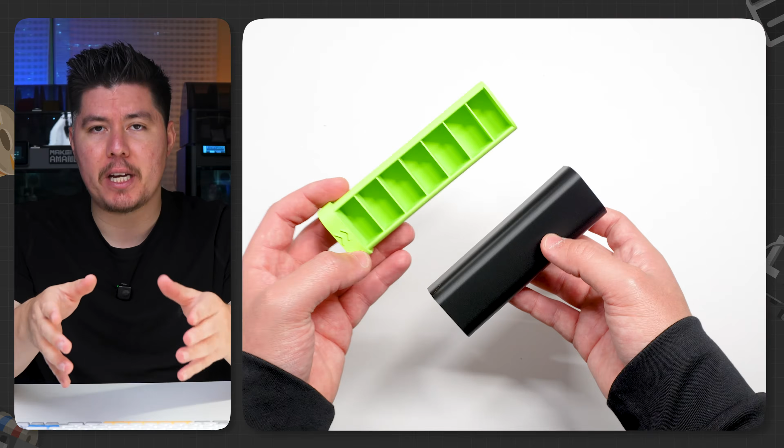Welcome to day 6 of learning how to design for 3D printing, and in today's video we're going to learn how to make this 3D printable pill organizer from start to finish. This design is going to be a little bit more complex than what we're used to, but I promise I'm going to walk you every step of the way, and by then I'll show you exactly how to 3D print a model and even more so how to 3D print a design when you're trying to use as little supports as possible to get the best outcomes for your 3D prints.

So with that said, let's go ahead and jump right into my computer and get started. Okay, so here we are within Fusion 360, and the first thing we need to do here is to create a new design. To start, let's hover over to the right hand side, click on New Design, and Fusion 360 is going to prompt us to select an option.

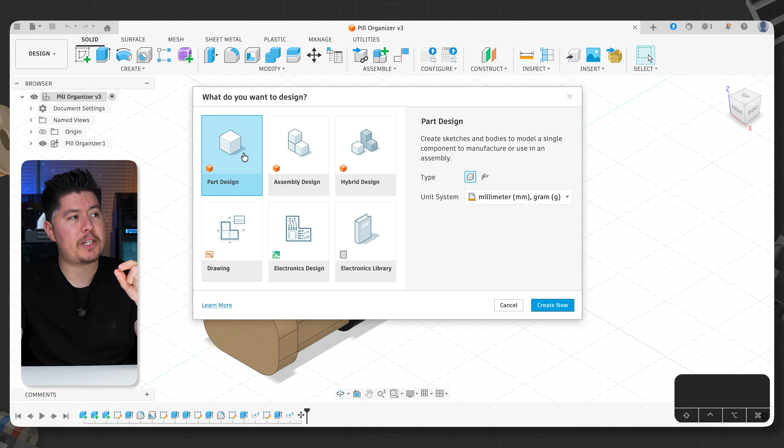Now, this video is going to be a little bit different since we're creating two parts and pieces which make up the entire product. Instead of selecting part design, which creates an individual part or piece, we're actually going to select hybrid design, which lets us create multiple parts and pieces that interact with each other within Fusion and that we can separate, giving them their own unique profile and identity within their timeline. With that said, let's go ahead and select hybrid design and click on Create New.

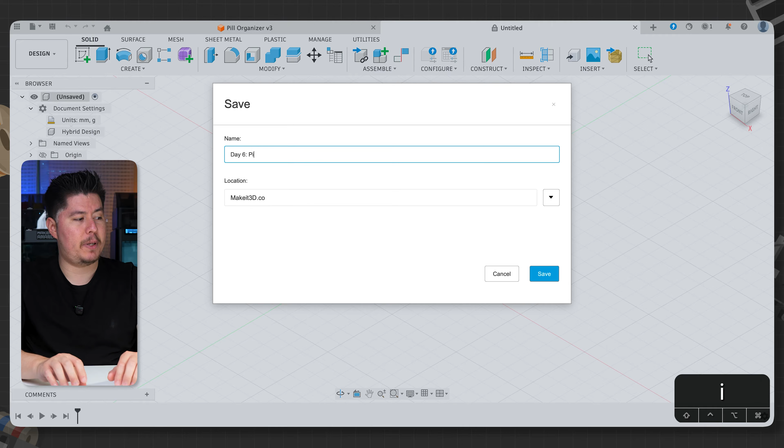Now, the first thing we want to do here is to save this. So I'm gonna press Command S, type in day 6 pill organizer, and press save. Now, with that completed, you can see here on the top left-hand side in our browser menu that this has been saved within our canvas here. The next thing I want to do here is to create a total of 2 new components, so that way we can actually separate the parts.

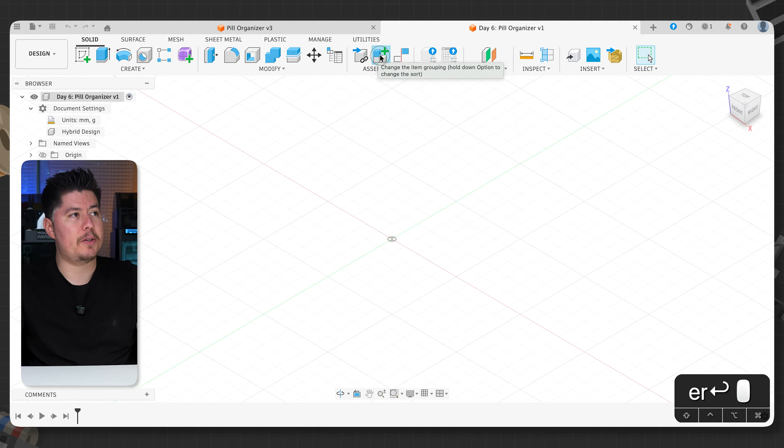So to start, what we want to do here is to select the new component icon here in the middle section of our screen. Select new components, and then this dialog box here is going to appear within our canvas. Now, don't worry about the extra options within our dialog box here. What we're going to do is just name this to slider, which is going to be our first component, and press OK. Now, as you can see, on the left-hand side, it has created a new component within Fusion 360.

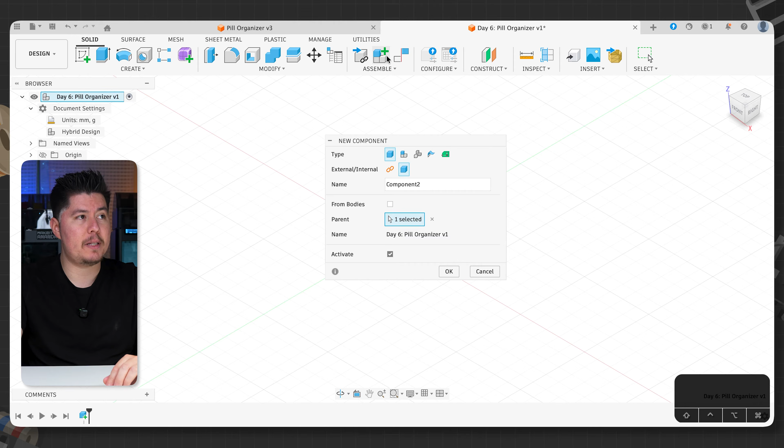Let's go ahead and toggle our top level component, which is going to host everything that we have beneath it. Then create another component, and let's go ahead and name this to container. And then press OK. Now, as you see within Fusion, we've created 2 new components. We have the slider, and then we have container.

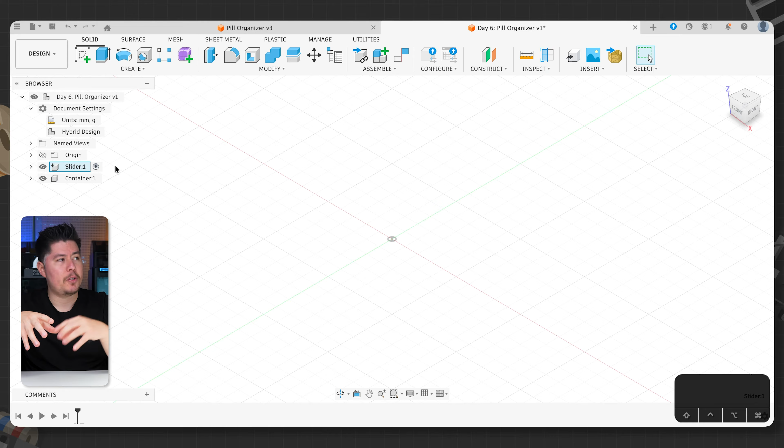Now, whenever we're working on a certain part or piece, we're gonna work on that piece individually within its proper component. And the reason why this is important is because, let's just say you want to create a design, but maybe you wanna test that design by changing the dimensions, the sizing, the features, or maybe something about that design. You can actually copy these pieces and paste it as an entirely new project without it affecting the original one, which I'll show you exactly how that looks later on in the video.

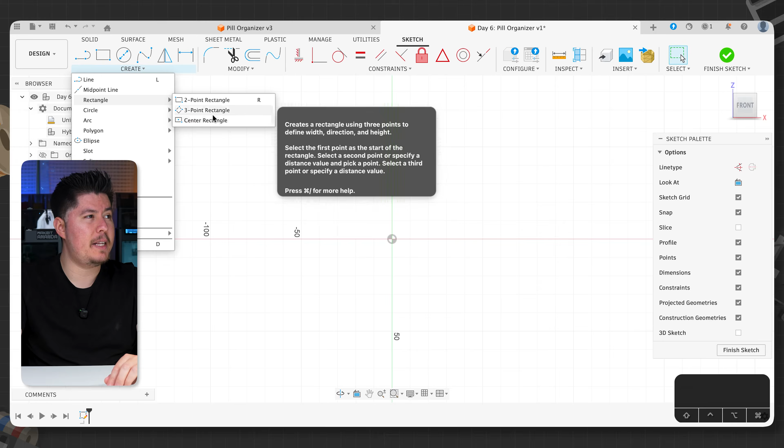So to start, let's go ahead and start off with our container, which is the easiest one. So go ahead and toggle the container component here and activate the component that allows us to start designing for that specific folder there. To start, let's go ahead and click on Create Sketch, then select the front plane here. Now what we want to do here is hover over to the top left-hand side, rectangle, then select center rectangle. From here, let's go ahead and draw out from the origin, and we're going to set the dimensions here to 30 by 40. Pressing enter on my keyboard, and now you should have something that looks like this.

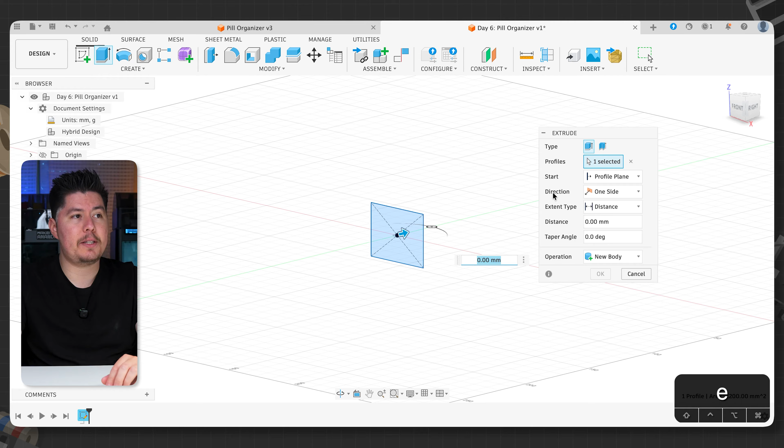Let's go ahead and press E on our keyboard, which is going to take us out of the sketch environment and allow us to extrude this profile. And what I want you to do is to set the direction from one side to symmetric. This means if I were to set the value to, let's just say 60 millimeters, by default, it's going to extrude one side of this profile 60 millimeters to the right, and then one side of this profile 60 millimeters to the left, which gives us a total length of around 120 millimeters.

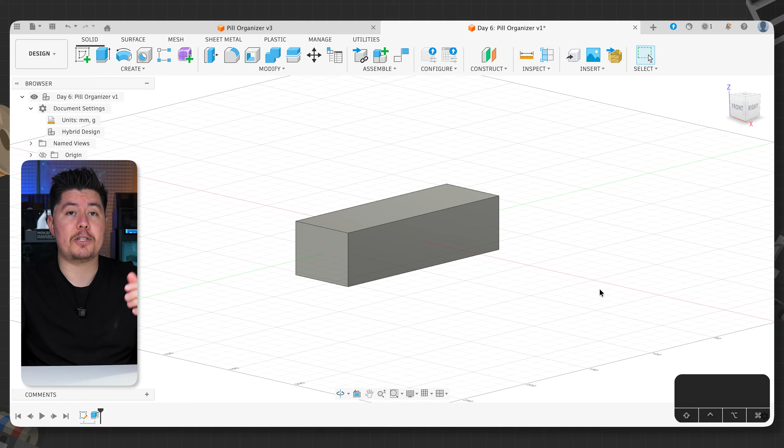So I'll go ahead and press OK. And just to confirm the length of this box here or this rectangle, you can use this inspect feature here called the measure icon. And you can measure one edge here of this box going all the way to the right. And as you can see, that is 120 millimeters, like as done with the extrude feature within Fusion. Let's go ahead and close this out, and let's start adding some features to this.

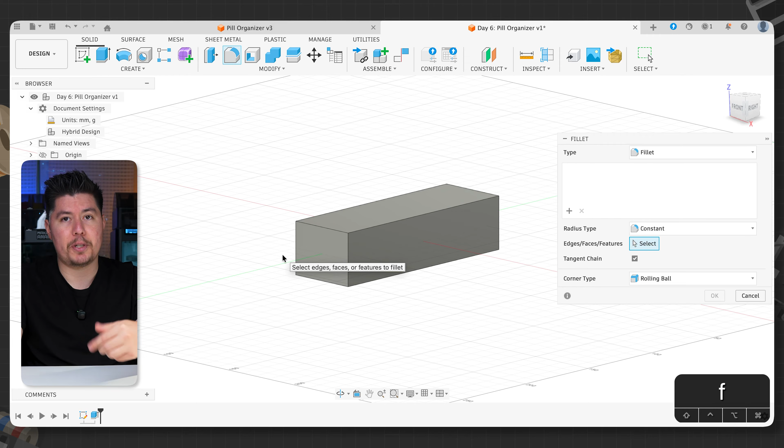So I'm gonna press F on my keyboard, which allows us to use the fillet option within Fusion, selecting all 4 edges around this rectangle. Now that we have all 4 edges selected, let's go ahead and fillet this in to around 10 millimeters, and then press OK.

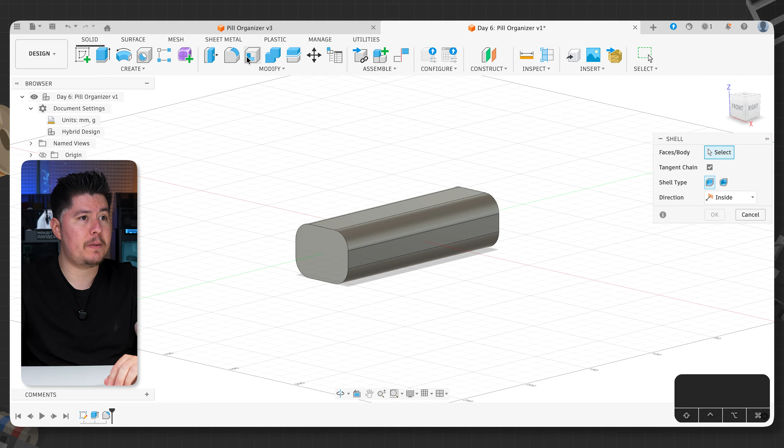Now, the next thing we need to do here is to create the opening or the insert for our pill organizer. To do that, we're going to use the shell feature within Fusion, then select this face here, and we're going to set the value to 2 millimeters. Once done, we'll press OK. And now you have the overall shape and features for our container. Now, with that done, go ahead and press Command S, make sure to save it within Fusion, press OK. And now let's move on to the next piece.

Now, to do that, we can hover over to the slider icon here within the components menu, and let's go ahead and activate this. Now, as you notice within Fusion, once you activate the new component, the previous one is going to turn into this opaque, transparent look. But what you'll also notice here is that our timeline is now completely blank. And if I were to toggle in between the two, our timeline has all the features we added, while if we were to toggle on the previous one, all of them are gone.

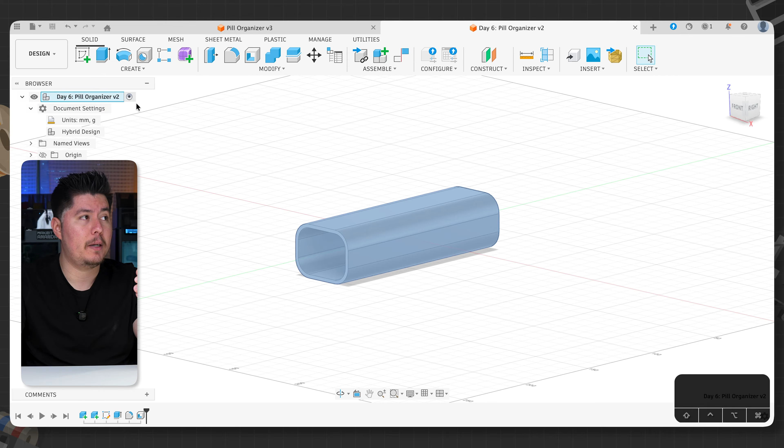Now, if you want to see the timeline for every single thing that you've created, you can toggle the top level component here, which is going to show everything you've done from the very start, which is why it's critical to organize these parts and pieces, because you can actually see everything you've done from the very top level to its own unique level where you created its component. So let's go ahead and activate the slider component here within Fusion, and let's start with our sketch.

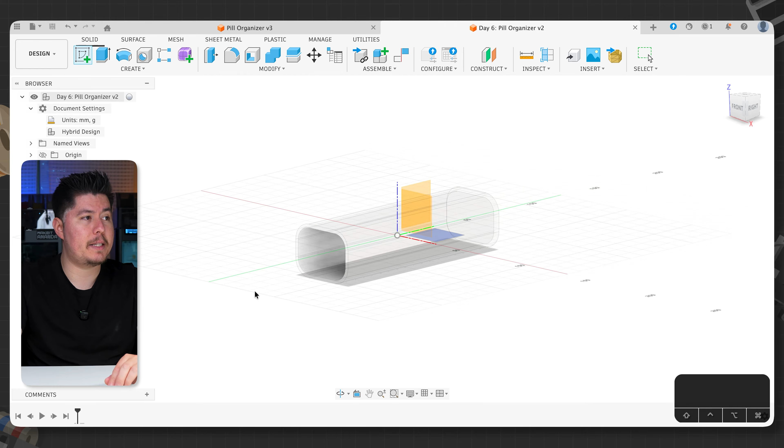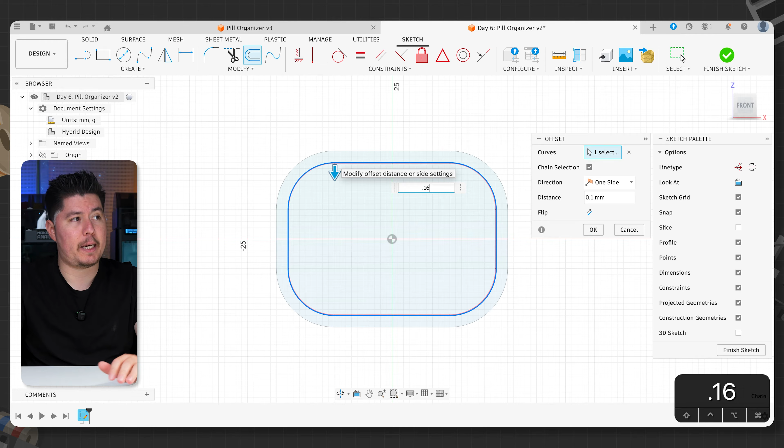So to start, we're going to click on Create Sketch, and then select the front face on our product here. Now, with that done, we need to create an offset. And this offset is going to create a gap for us to put in the pill organizer inside the container. So I'll press O on my keyboard, then select this edge or this sketch piece here, and drag this in to 0.16, making sure that the offset that you create actually goes inward instead of outwards. So 0.16, and then press OK.

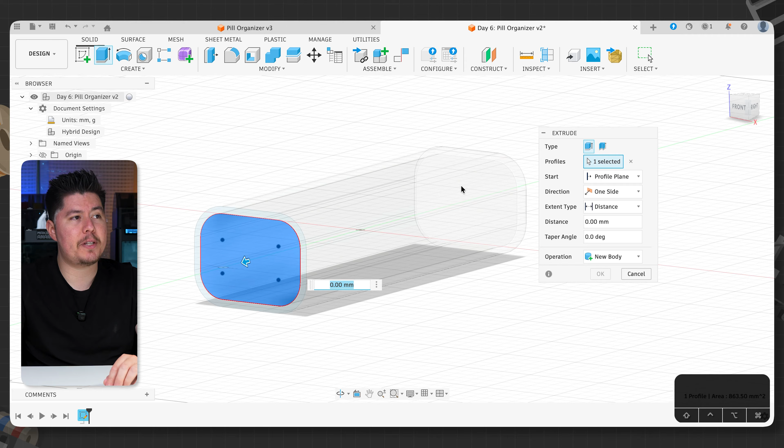Now, with that done, let's go ahead and press E on our keyboard, selecting the profile we just made. And now what we want to do here is to set this profile extending all the way to the very back of this face here. Now, you kind of can't see it. It's a little bit difficult to see, but as you notice here, as I hover over it, it highlights as my cursor goes over the product.

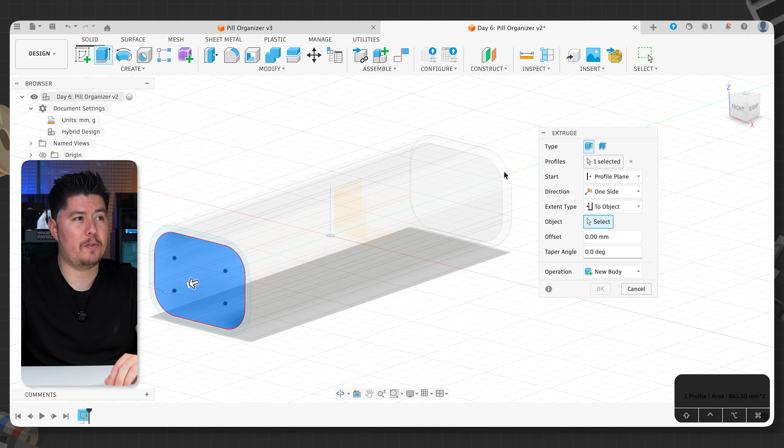So to do this, what I want you to do is to change the extent type from distance to to object. And then I can actually hover over my product here. And as I hover over it, it's kind of hard to tell. So what I'm gonna do here is rotate this around. I'm gonna select this face and hold down my cursor. And by holding down my cursor, this actually allows me to select the inside piece of my model here.

You can see here, it's actually separated into 4 different faces. What I wanna do is to select the face that actually represents the piece on the inside. And as you hover over it, it's gonna highlight it. You can see that this face is on the inside, this face is on the front, this face is on the inside, and this face is the curved edges that we created with that fillet.

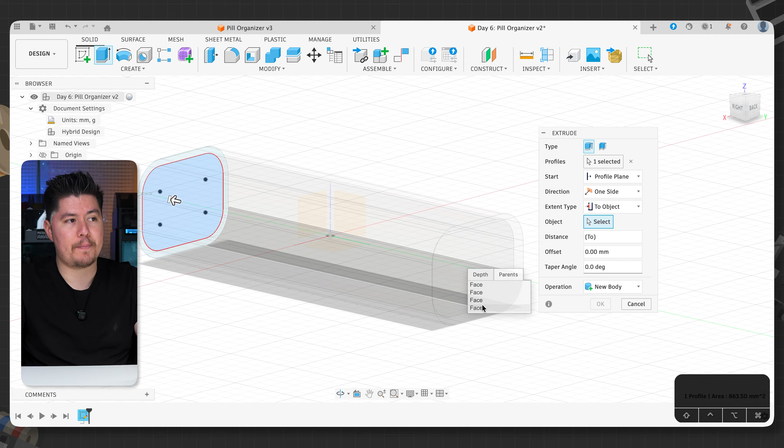What I want to do is to select this inside face. Now, you can't really tell that well unless you actually zoom in, so I would suggest you zoom in, hold your cursor, then go ahead and select the second face here.

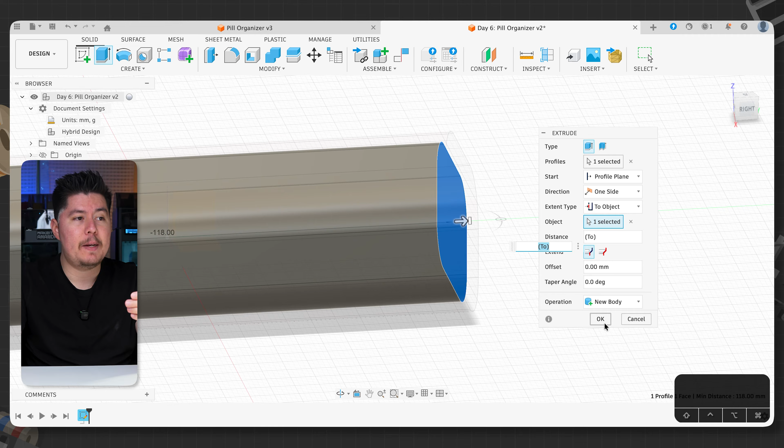Once done, that's going to extrude your profile going all the way to the inside of your container. Now, the unique thing about this feature is that this is going to extrude it all the way to the very end, which means that since this is extruded all the way to the very end and the distance is set to To, let's just say if I wanted to make my pill organizer longer, and just to quickly show you,

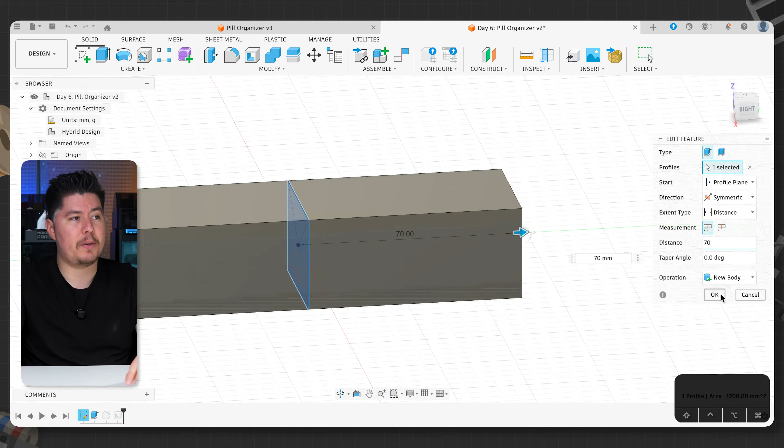what I'm going to do is I'm going to hover over to my container. So don't follow along, I'm just quickly showing you. Going to container, and let's just say I wanted this to be longer for whatever reason. So maybe instead of 60, I set this to 70. And I press OK. You can see now the slider that we created is going to extend all the way, factoring in that 70 that I preset there.

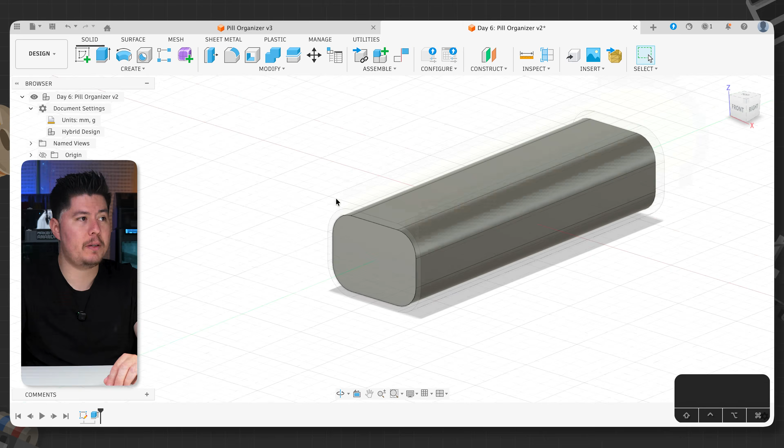So of course, I'm going to undo this since this doesn't follow along the original part of the tutorial. So like I mentioned, don't follow along. I'm just quickly showing you what that looks like. So going back to my slider here, now that I have my product fully modeled within Fusion, the next thing we need to do here is to create the handle for our container. More specifically, a part or piece that we can actually get our hands on in order to pull this out.

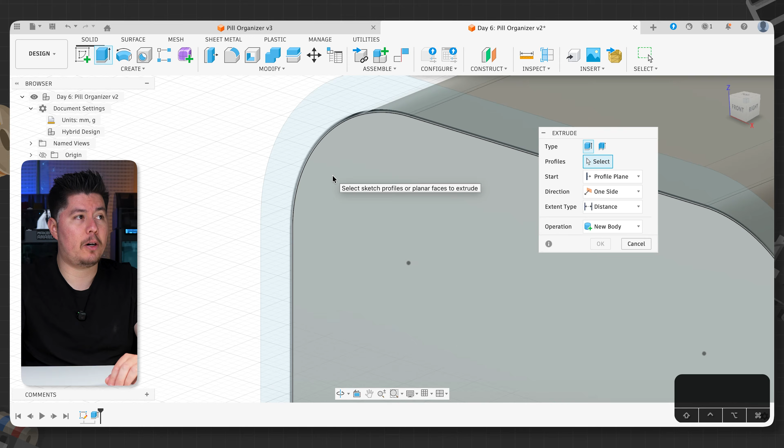So if I were to press E on my keyboard, what I'm gonna do here is toggle on my slider and make sure to turn on Sketch 1. Then from here, zooming in, we're gonna select all the profiles that we just created here, making sure that you select the one that we just created in the center, which is the offset one. Then pressing E on our keyboard, setting the distance to 10 millimeters, and make sure the operation is set to join and press OK.

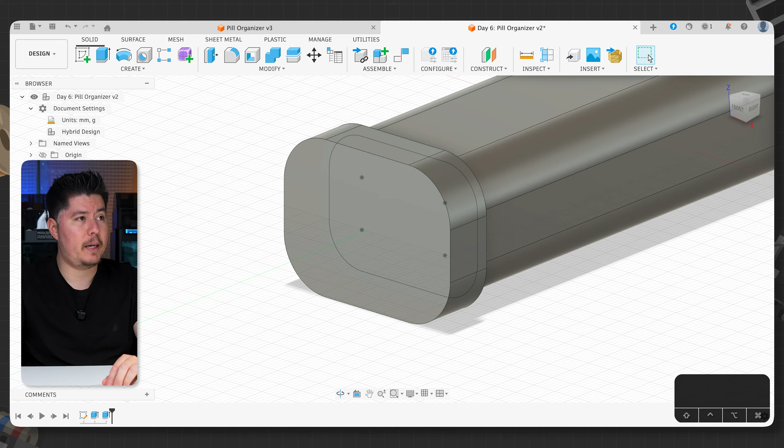Now let's go ahead and turn off our container since we won't need that for now. So I can toggle off the eye icon here on the top left-hand side, and now we've turned off our container. Okay, so now that we've created our container, the next thing we need to do here is to create an opening for it, as well as some cutouts and subsections to put in our pills.

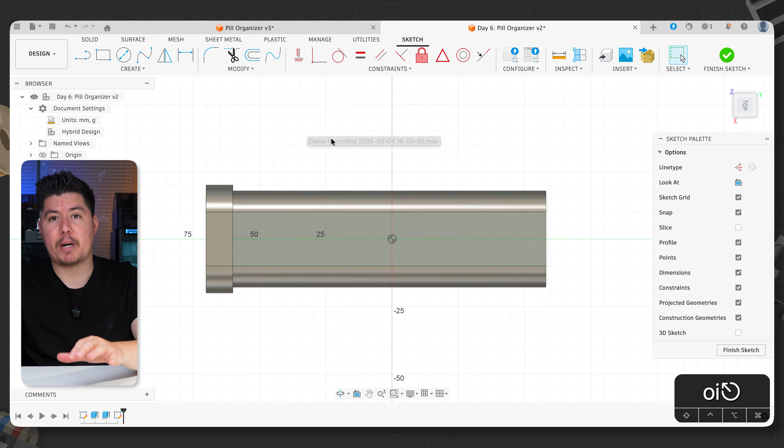So to start, we're gonna click on Create Sketch, then select the top face here. And what I wanna do here is reorient this to get a better look, and I'm gonna press O on my keyboard. This is gonna allow us to create an offset. So I'll select this top face here, which is this line here, and I'll offset this by 4 millimeters. I'll press enter, and as you can see, this created a rectangle going all around our product. Now, don't worry if it extends over our design.

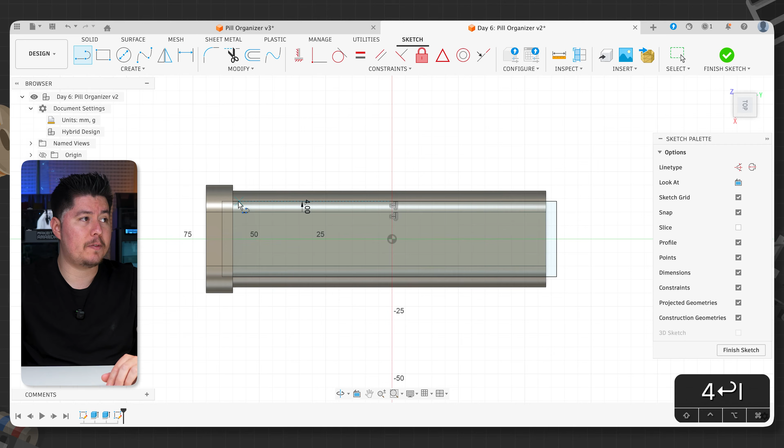What we're gonna do is press L on our keyboard and then create a total of 2 lines. One here at the left, making sure that there's some spacing between this line here and this line here, and one here on the right. Don't worry if it's not perfect. We'll dimension this out by pressing D on our keyboard, selecting the edge of the body, then our sketch, setting the value to 2 millimeters. Same thing for the left-hand side, setting this to 2 millimeters. And now we have our profile.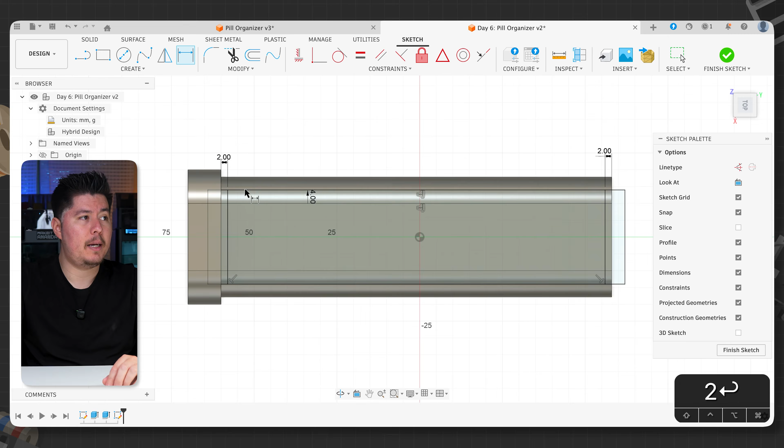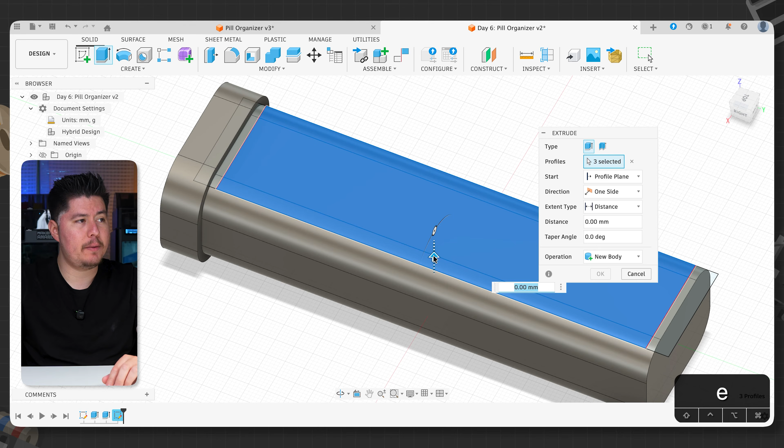Then we're gonna press E on our keyboard and select the profiles that we just created, which is a total of 3 different profiles. And as you can see, since we created an offset that sketched out the entire piece here, we can just use the ones we created on the inside rather than using the whole sketch. So let's drag this down to somewhere around -22 and press OK. Make sure the operation is set to cut so that way you actually cut into your product.

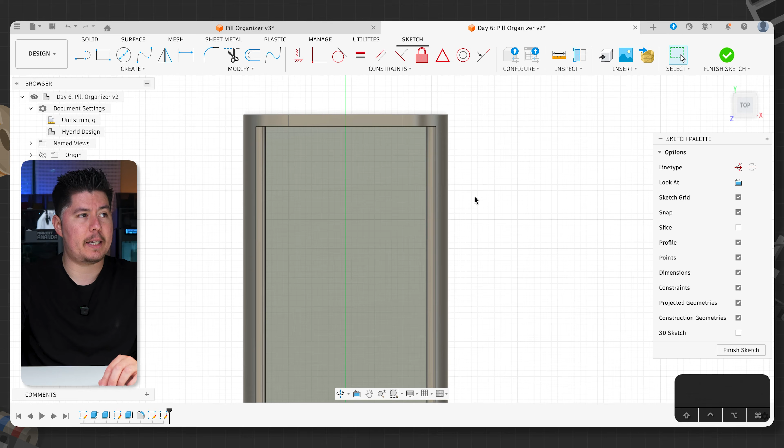Okay, so the next thing we need to do here is to create several different sections. To start, we'll click on Create Sketch, then we'll select the bottom plane here. And what we want to do here is to press L on our keyboard and create a total of 2 lines from the left-hand side going all the way to the right, making sure it's completely straight.

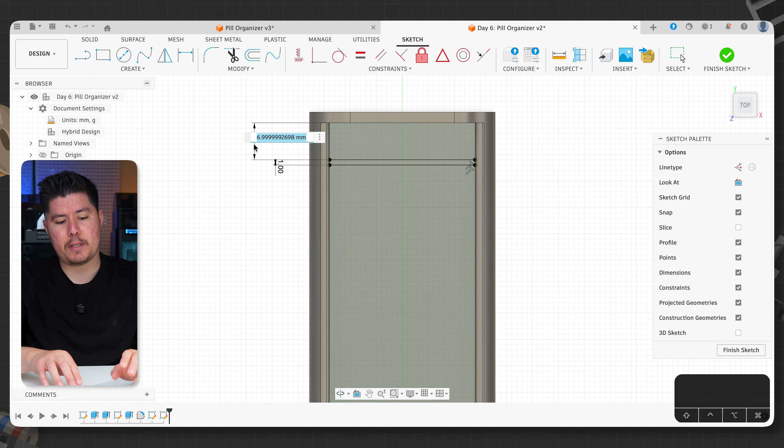Then from the left all the way to the right once again, then pressing D on our keyboard, we'll go ahead and dimension this out. And I'll leave this to around, let's just say 1 millimeter. Next, I'll also dimension the side here. And I would say somewhere around 25, which is a little under 1 inch, but pretty close to 1 inch. So I'm good with that.

Once done, let's go ahead and finish sketch. Press E on our keyboard, and let's go ahead and drag this out. And we'll drag this out all the way to the very top, right as it meets our fillet. I'm gonna make sure to set the operation to join and press OK.

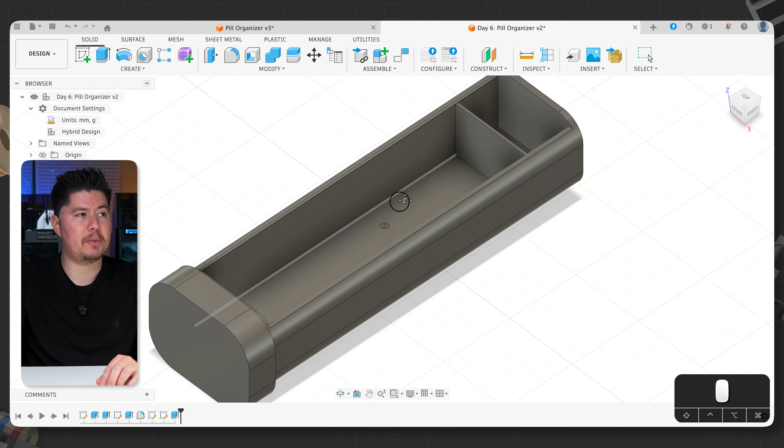Now, with that complete, let's go ahead and finish this up by using this feature called Pattern on Path, which basically allows us to duplicate the feature that we just created without having to manually sketch it and manually extrude every single profile. So to do that, we'll press S on our keyboard, which brings up the design shortcuts, and we'll look up a feature called Pattern. So we'll type in Pattern, and then use this feature called Pattern on Path.

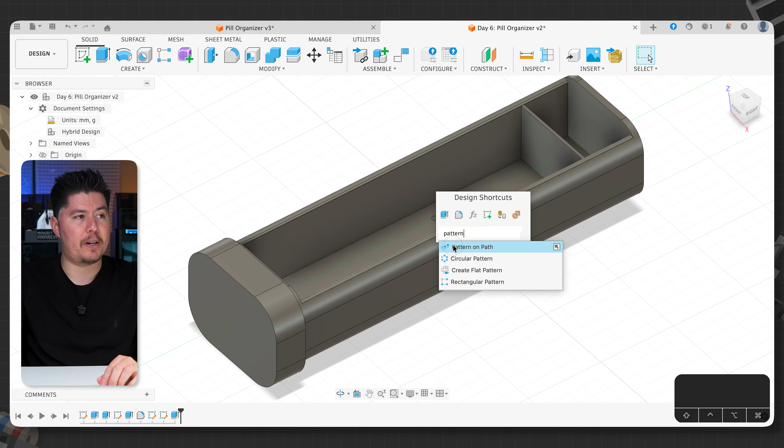Then we'll select the object type to features, selecting the objects, which is in our timeline, which is the last feature we just created, then selecting the path and making sure that we select the bottom line here, which is going to use as our reference for this path. Now we're going to go ahead and drag this out all the way to the very edge, just kind of eyeballing this for the most part. Doesn't have to be perfect.

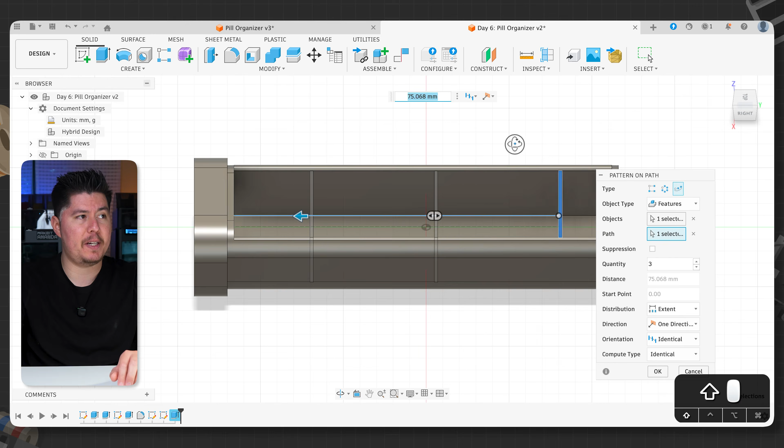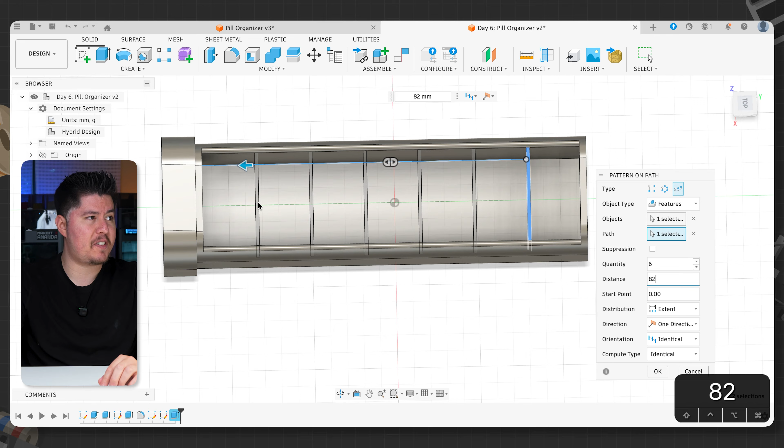And we'll create multiple quantities. So from 3, we'll actually change this to 6. And we'll kind of drag this out to get a good look as to what those look like. And I'd say 82 will work just fine. So I think this is just enough. Doesn't have to be accurate. We're not aiming for accuracy. We're aiming for practice. So I'm good with this. Looks like there's enough spacing in between each part. Make sure that you have your setup exactly as mine and press OK.

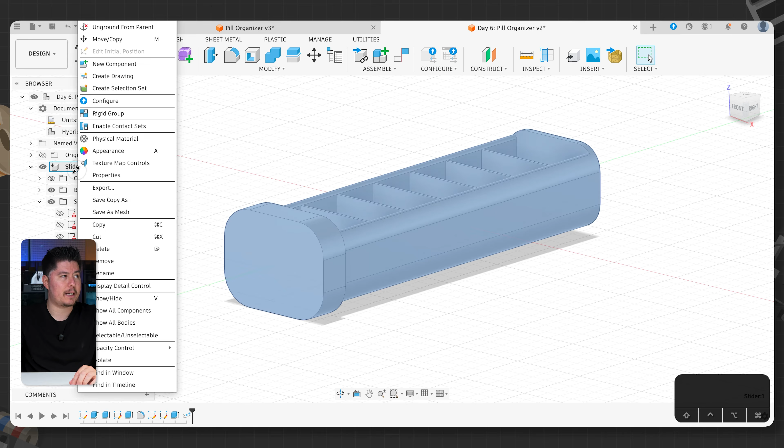Now that you have multiple sections for your product, we're pretty much almost done. So the last thing we need to do here is to export this into our slicer. But one key thing to consider is that since we have this product fully designed, if we were to try to export this to our slicer, and just to quickly show you, so I'll right click on my body, save as mesh, and then export it to our slicer, you'll actually see that inside our slicer we're not actually able to 3D print this without supports. And let me just quickly show you.

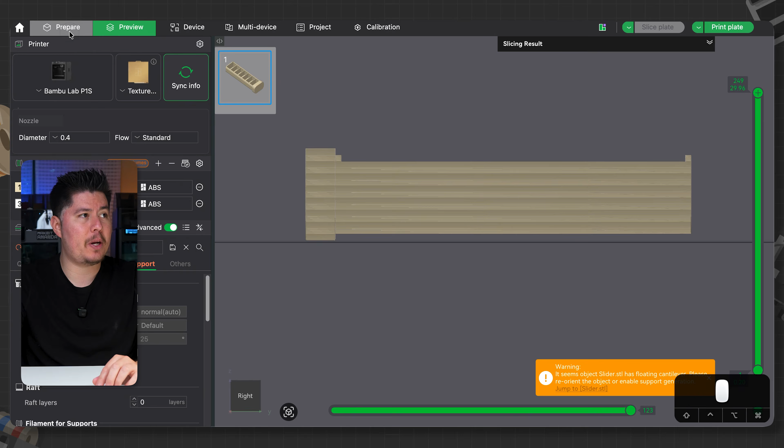So for example, if I were to disable supports, then click on Slice Plate, you can see that there is kind of like some spacing underneath our product, which can be an issue because if we're trying to 3D print this, well, this is obviously not going to print the right way. And if I were to reorient this, let's just say 90 degrees, so maybe right side up, and click on Slice, you can see that the interior piece would require supports, which obviously is something we don't want.

And no matter what direction we set this product in, whether it's 180 degrees going from the bottom up, same exact thing. And obviously this is an issue because for a product where we're trying to avoid supports, well, realistically, we would have to add them in order to get the result that we want. But there's actually one feature that we can use within Fusion that can quickly change our ability to print this without requiring supports. And I'll show you exactly how to add that feature.

So let's go back into Fusion and let's add this feature called chamfer. And we've already used this feature before. We've used it many different times. But in fact, if you're able to change your design in such a way that doesn't affect the output or what it does, just by simply changing the design, then I'm all for it.

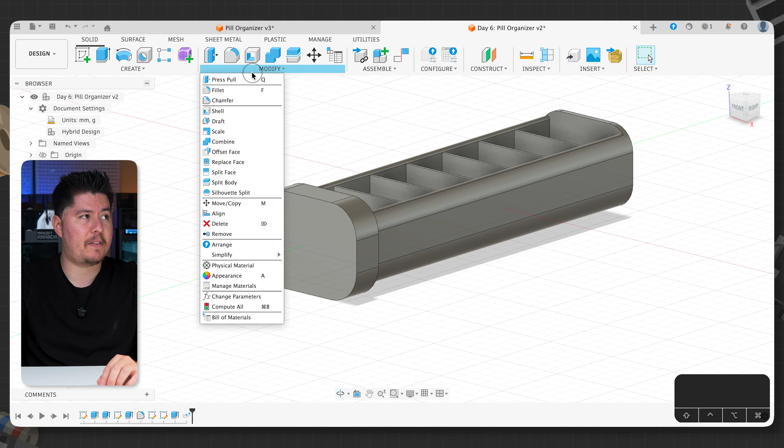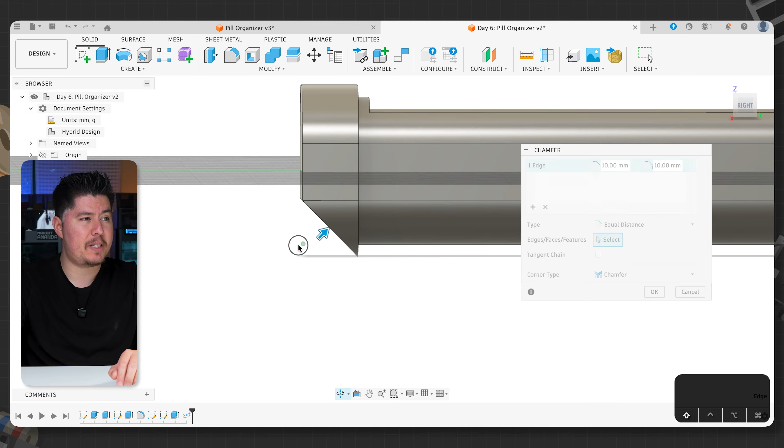So I'm gonna go ahead and add a chamfer by selecting modify, clicking on chamfer. And what I wanna do here is to select this bottom edge. Just make sure that the edge that you select has tangent chain turned off. So go ahead and turn this off, then select this edge, and let's go ahead and drag this in to, let's just say, around 10 millimeters. So that's just thick enough or chamfered enough. I would say actually maybe a little less, let's just say 8. That looks good to me.

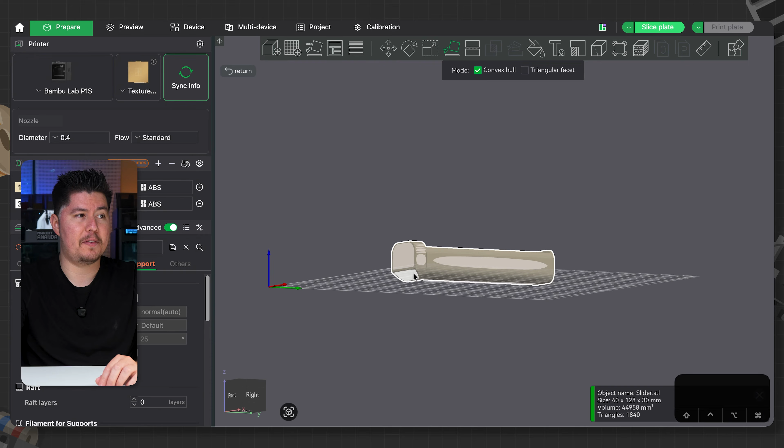Press OK. Now, if we were to go ahead and export this to our slicer, right click, save as mesh, and export this to our slicer. I'm gonna delete the previous one. And now, as you can see, we can actually reposition this on this face and then slice it. And now you get the exact same model without having to use supports.

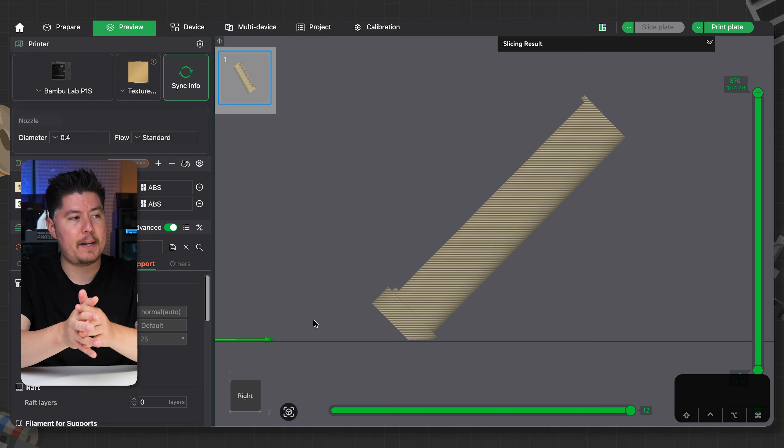And one thing to consider about 3D printing is that not every product or design you make is gonna be 3D printing friendly, meaning that sometimes it's gonna require supports, external pieces, or sometimes it might be an organic structure that isn't so square or rectangular, and you'll often have to reorient it in such a way in order to get the best quality or results possible. And in this instance, we added a chamfer at the bottom, which connects this face here to the surface area of our build plate, allowing us to print this at a 45-degree angle.

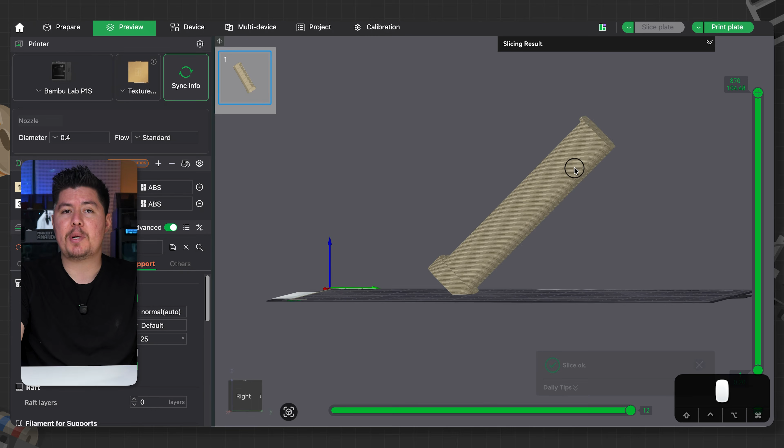And just to quickly show you, if I were to turn on supports, turn on auto, and slice plate, you can see that this is not going to generate any supports, simply because most 3D printers, especially newer 3D printers, are pretty good at handling these sort of things. And for the most part, as long as you have a clean build plate, you'll have no issues with this.

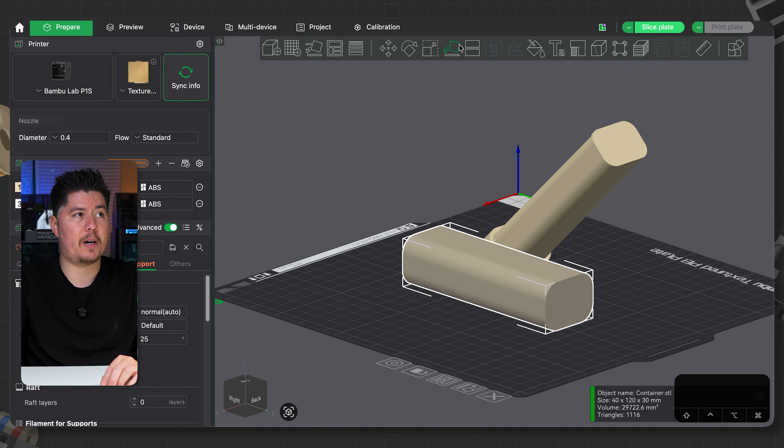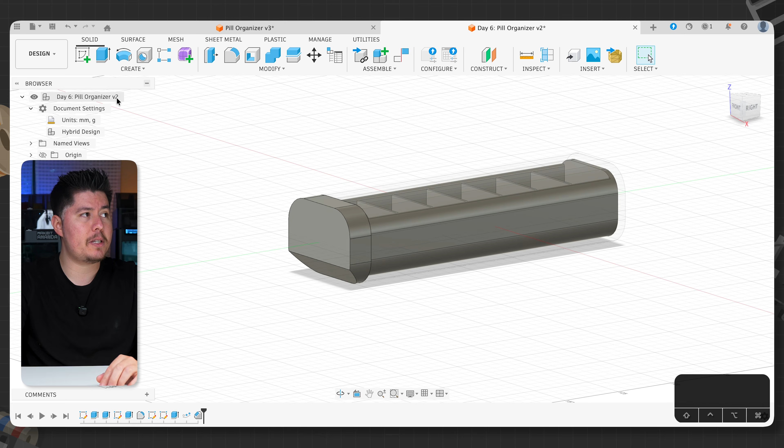So let's finish this up and go back into Fusion, because one thing that we have within Fusion is the components here on the left-hand side. And I wanna quickly touch on this for those of you who are getting used to designing within Fusion, and even more so if you wanna further your skills around this software. So one thing to consider is that if we were to go ahead and toggle on our top level component, which is everything that we created underneath our component, you can see that now our timeline has been filled with everything that we've done up to this point so far.

And if we were to select individual components, it's actually going to show exactly what we made or designed for that specific piece. And if we toggle on our container, it's going to show exactly what we've made or designed in our timeline here at the bottom of our screen. And the cool thing about Fusion is that you can individually work on parts and pieces, which is in essence the hybrid design approach within Fusion, which allows you to work on individual Lego blocks without it taking up your whole timeline.

And this is incredibly important to get into the habit of doing, because this allows you to organize your products, designs, and files, and make changes on the fly without having to manually sift through a timeline to find exactly where you left off for a specific piece. So with that said, I just wanted to add that quick point. Let's go ahead and go back into our slicer, print this out, and see how it turns out. So with that said, that pretty much wraps up today's video.